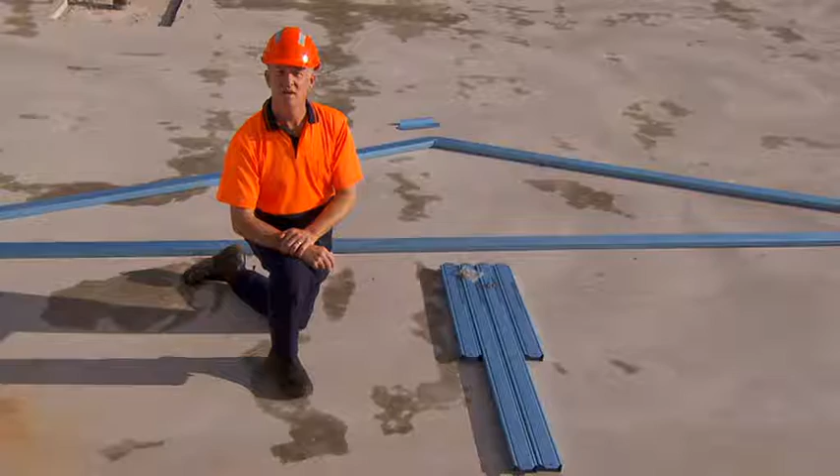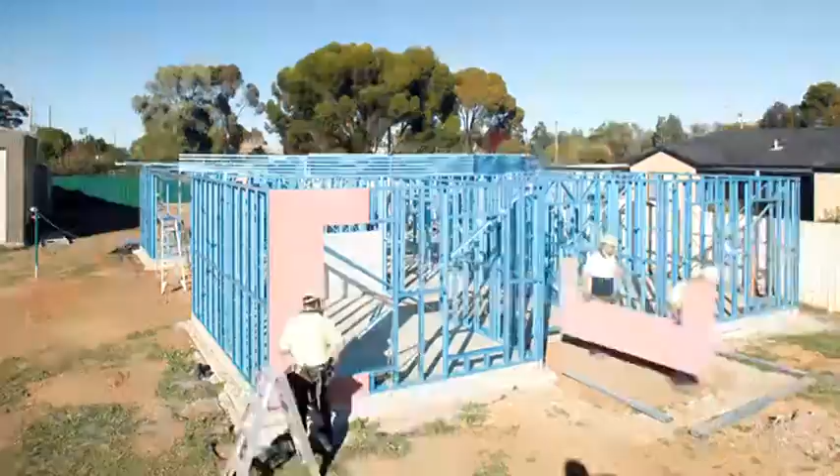And we'll show you how easy it is to assemble our building system on your construction site. This video offers general installation advice. Refer to the Enduro Wall and Enduro Truss design manuals, construction guides and the BCA for full details.

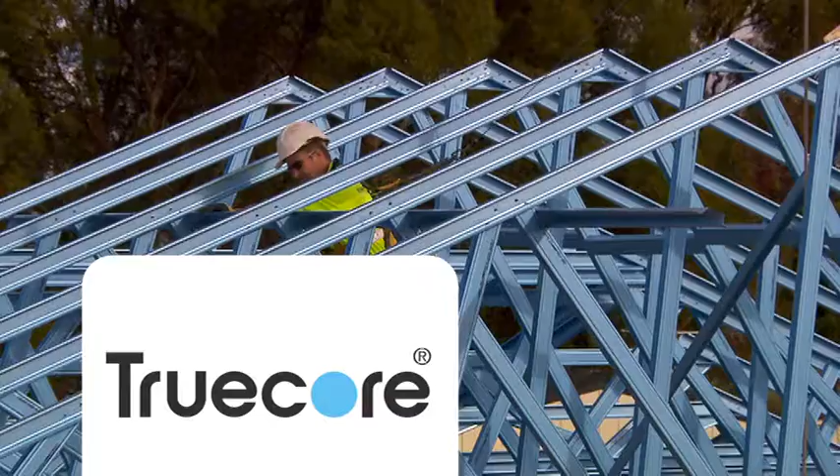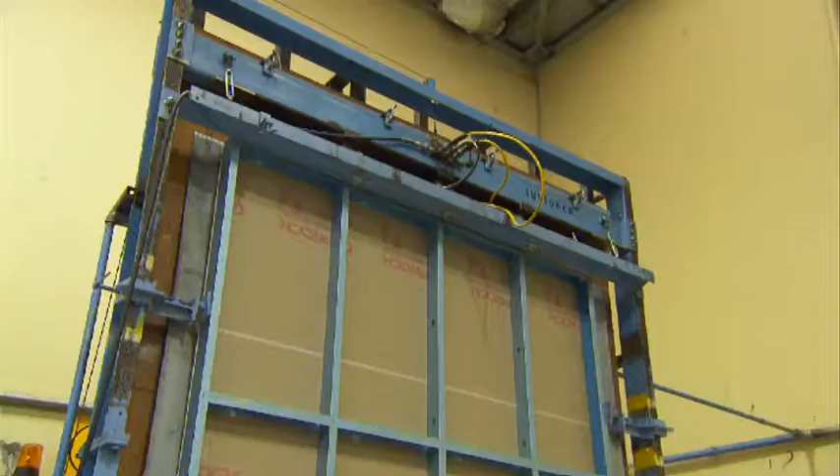Enduroframe structures are detailed and designed using our latest CAD technology using Australian-made TRUECORE steel. The result is a building system that has been designed for the builder. You can use the Enduroframe system with confidence because it's fully engineered and tested by BlueScope Steel.

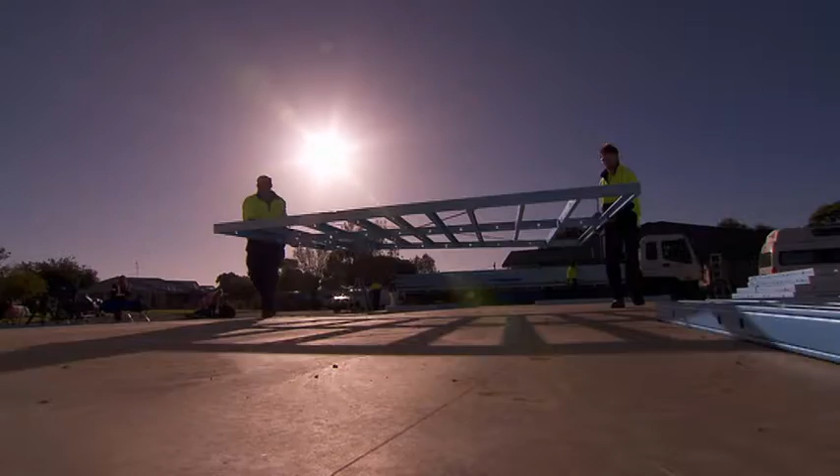The Enduroframe building system can be supplied either as a fully assembled frame or a knockdown kit of components for your site assembly. The lightweight Enduroframe building system is made up of the Enduro Truss roof system and the Enduro Wall framing system. And it's easy for you and your crew to assemble on virtually any building site.

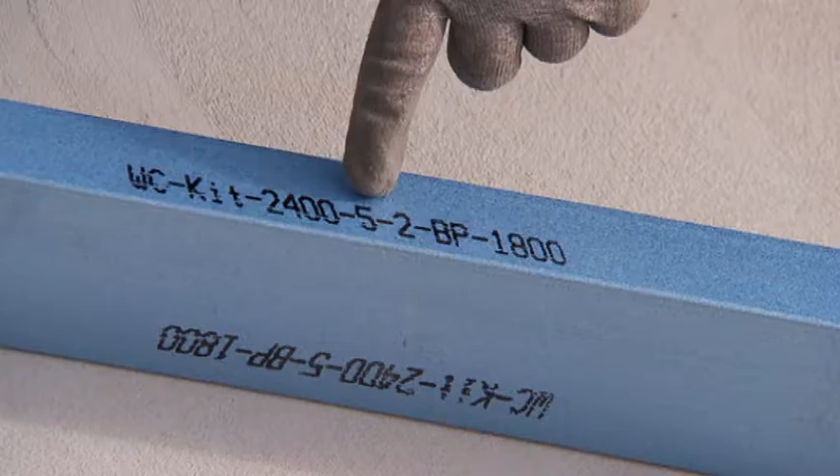You'll see that each part is marked with the job name, frame or truss number, part number and part usage, making it simple for you to work out which part goes where. All you need to do is match the parts provided with the drawing, align the pre-punched holes and screw it together. It's that easy.

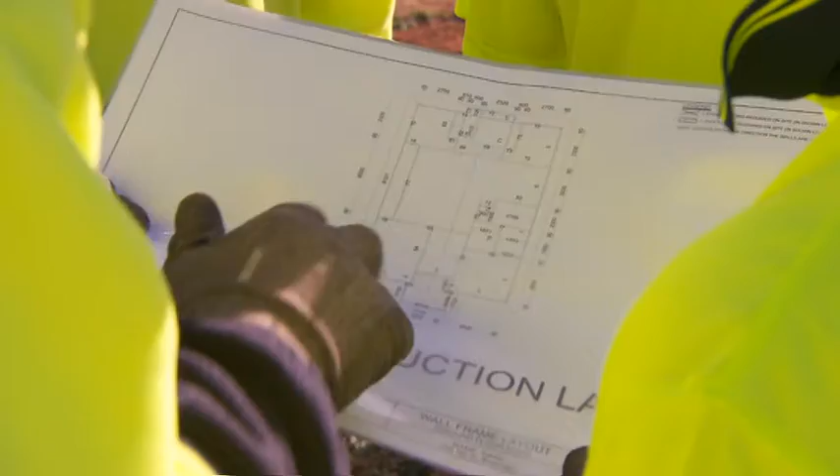Our first consideration is worker safety. The HIA recommends a safe work method statement be written and that the worksite conforms to the safe work practices in the BCA. And make sure you read our installation manuals before you start work.

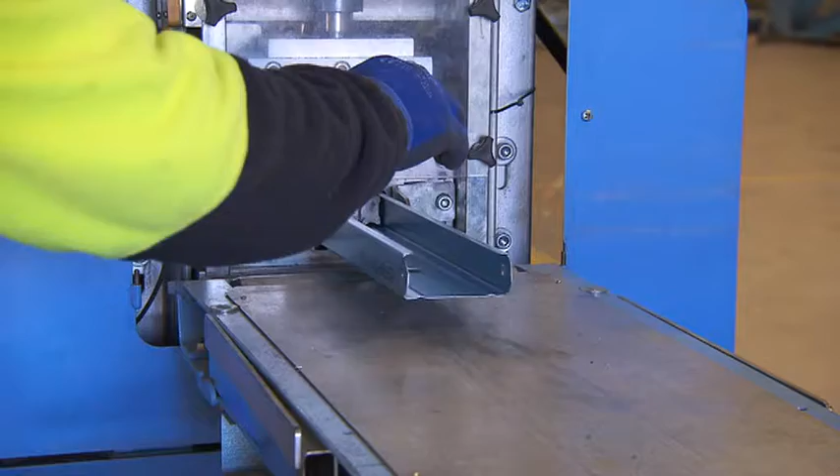Your building plans are input into the Enduro CAD software where the complete structural frame is detailed and prepared for production. The Enduro CAD system outputs assembly drawings for all wall frames and roof trusses, layout drawings to locate the assemblies on site, and documentation for authority approvals.

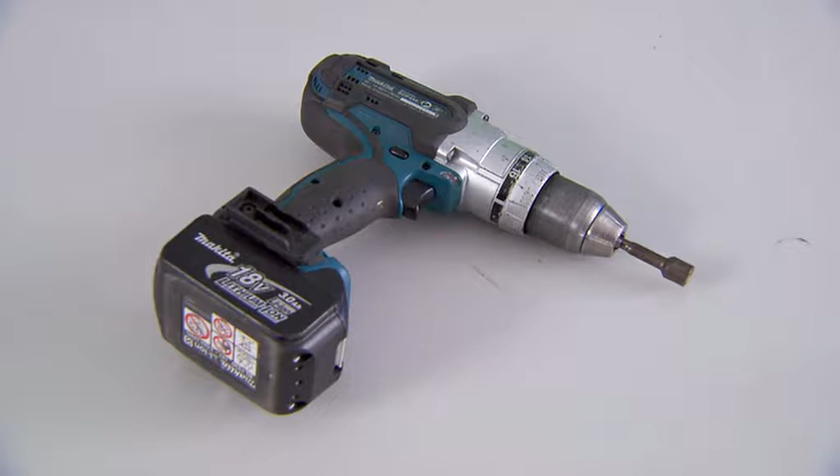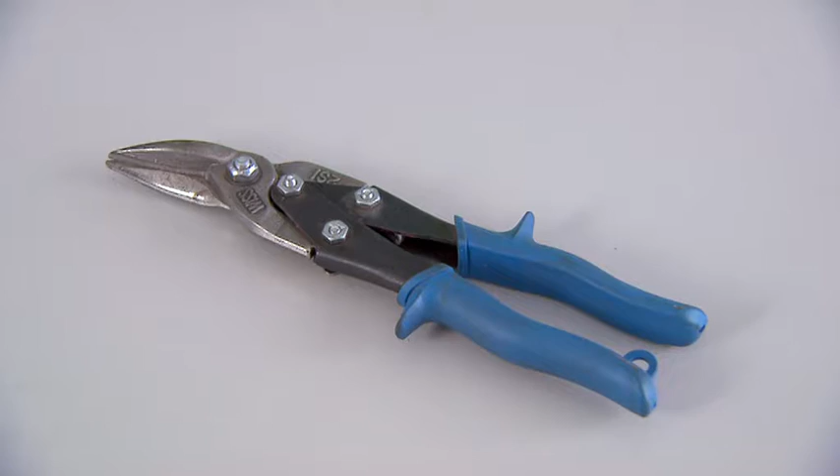Okay, now let's look at a wall frame assembly. Here's the tools you'll need. Screw gun with hex head bits, handheld grinder, cordless drivers, circular saw with metal cutting blades, tin snips, spirit level, marker pens, string lines, clamps or vice grips, measuring tape, a hammer and finally a hacksaw.

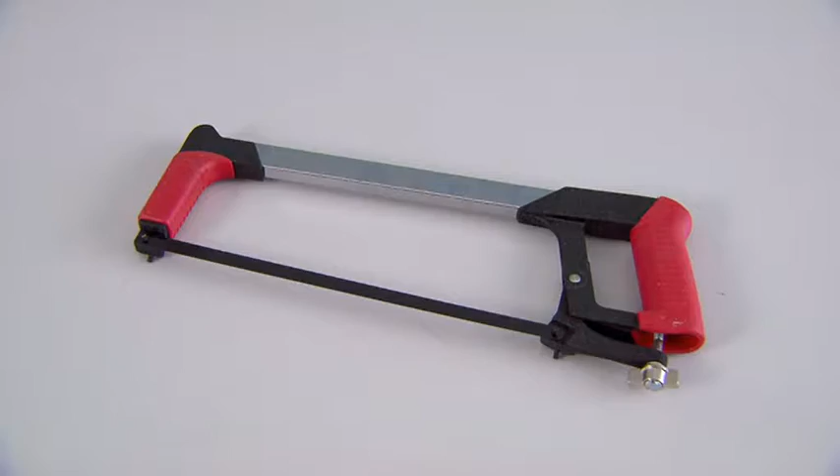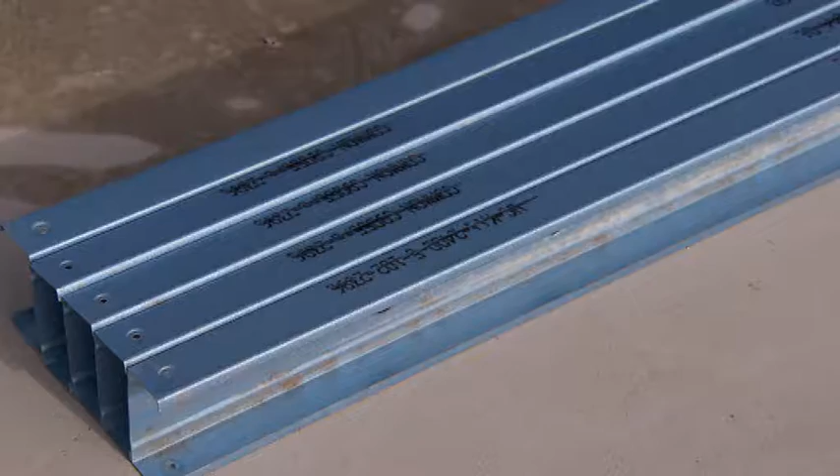Each wall panel will arrive separately bundled with the components clearly labelled. For on-site assembly, the assembly order should match the erection sequence. Refer to the Enduro CAD layout drawings supplied. Identify the plates, studs, heads, sills, unders and overs from the branding information on the parts. Lay out the top plate, bottom plate, noggin and studs in the correct orientation.

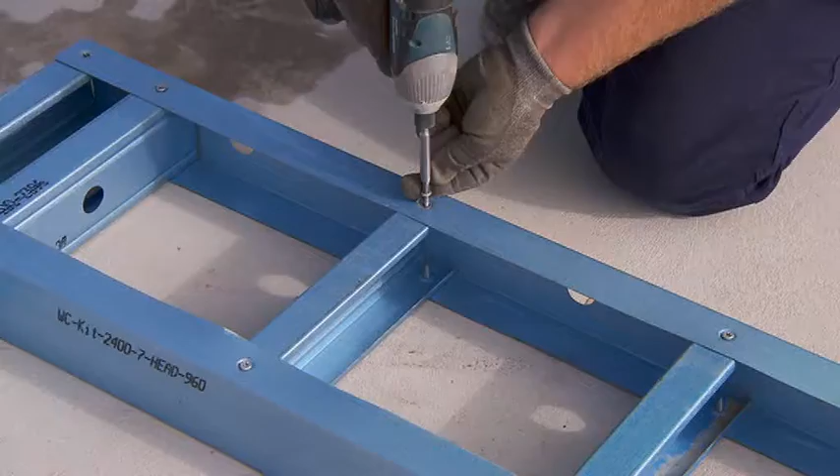Pass studs through the Enduro Wall continuous channel noggin and engage the studs into the bottom plate by aligning the dimple positions. The dimple holes and notches enable easy component layout and assembly. Fix through the top face with a framing fastener. Engage the overs into the heads and top plate, fixing the top face with framing fasteners.

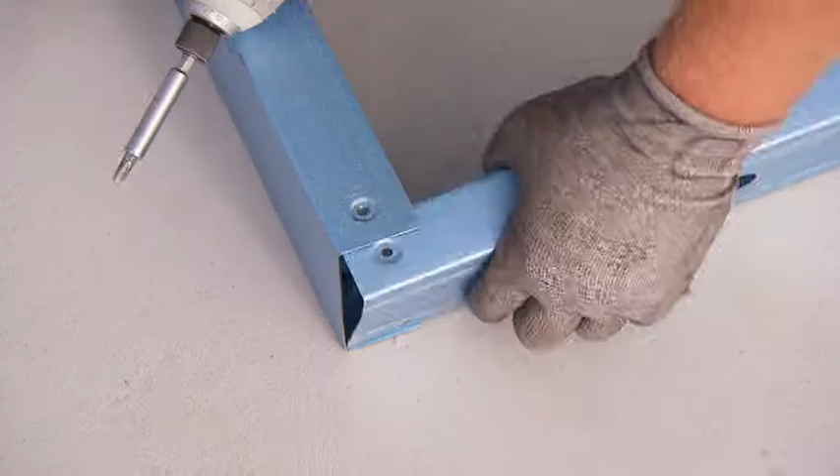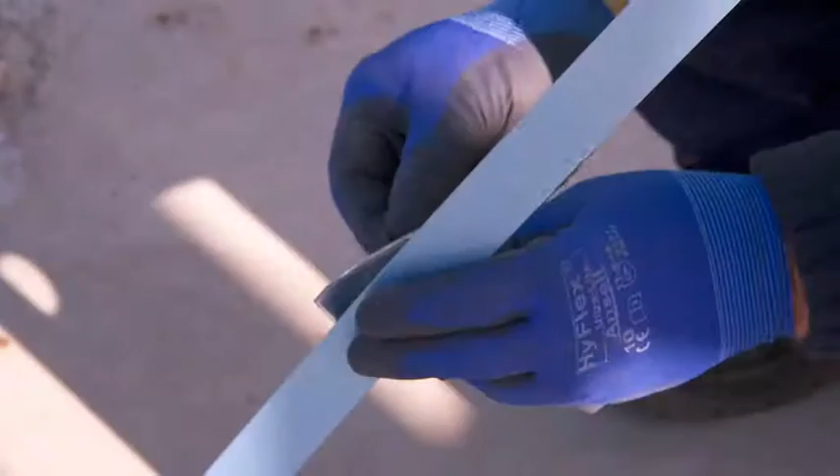Slip the top plate over the studs and align the holes. At this point, fasten all aligned holes. Flip the frame and install framing fasteners into each aligned hole. For factory assembly, jigs and lifting equipment may be used to aid the assembly. Square the frame using a jig or by measuring diagonals and install bracing. Strap bracing should be left untensioned as this is completed after frame construction.

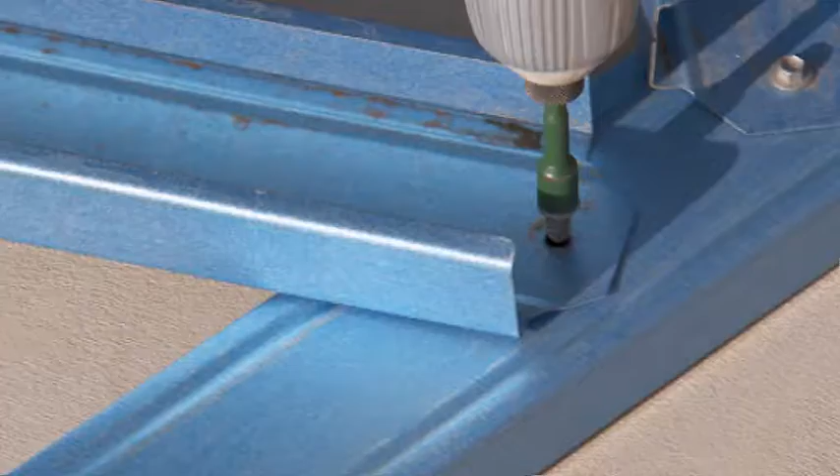Okay, let's look at a truss assembly. Trusses utilise the Enduroframe system of matching punched holes for assembly. As you can see, no jigging is required, which means that either on-site or factory assembly is possible. Again, components are branded with the job number, truss and part number. Webs are numbered from left to right and chords counterclockwise around the truss from the bottom chord.

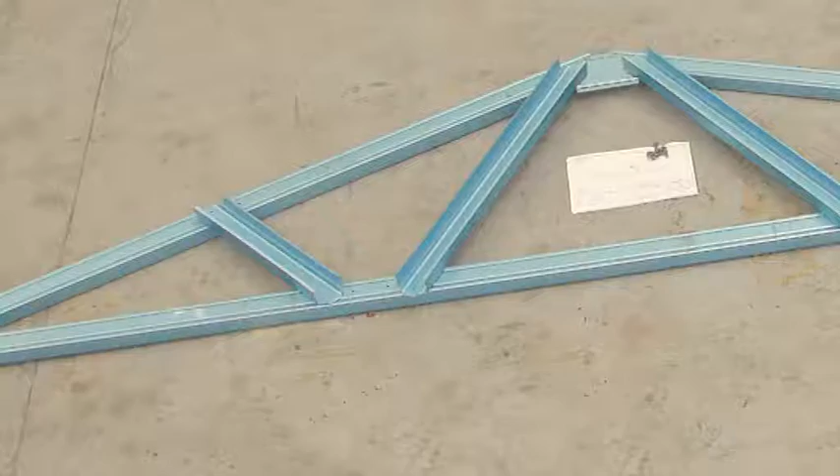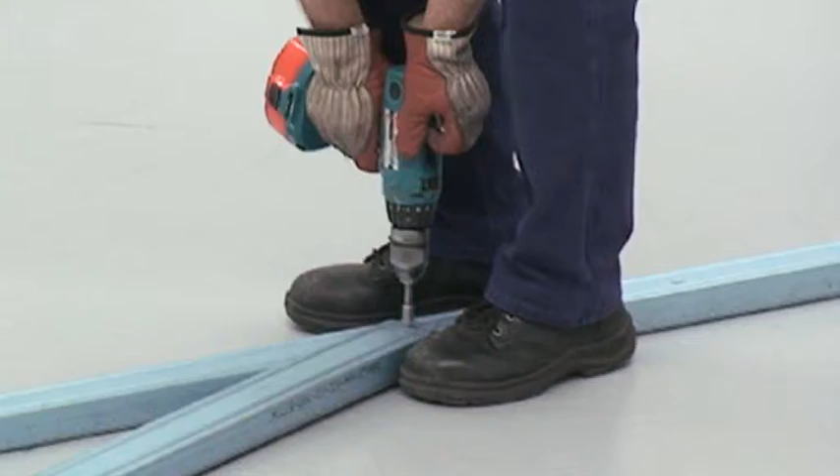The assembly of each truss is simple. Let's look at a basic A truss. Referring to the assembly drawing and the detailed connection drawing supplied, lay the chords in their approximate location, toes down. Engage the top chord into the bottom chord notch and align the appropriate holes. Align the holes at the end of the top chords and fix with a truss framing screw.

Place the short apex stiffener across the apex as shown on the connection drawing. Align the stiffener end holes with those on the truss top chords and fix with truss framing screws. Now, locate each web, either toes down if a flush configuration or toes up if non-flush. Align the holes with those punched on the chords and fix with truss framing screws.

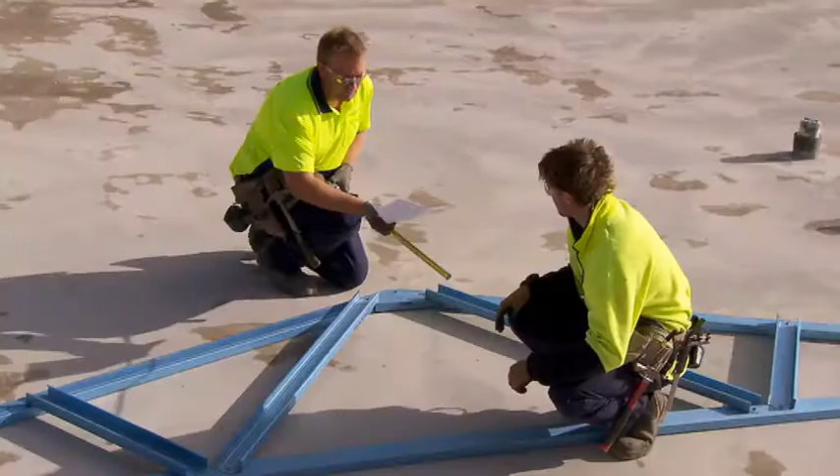Note, the webs should force the chords into the correct geometry without jigging. The truss will only go together one way. Check the overall height and span is correct. The overall height and span should now match the quality check dimensions on the assembly drawing. After this quality check, any boxing or reinforcing must be completed.

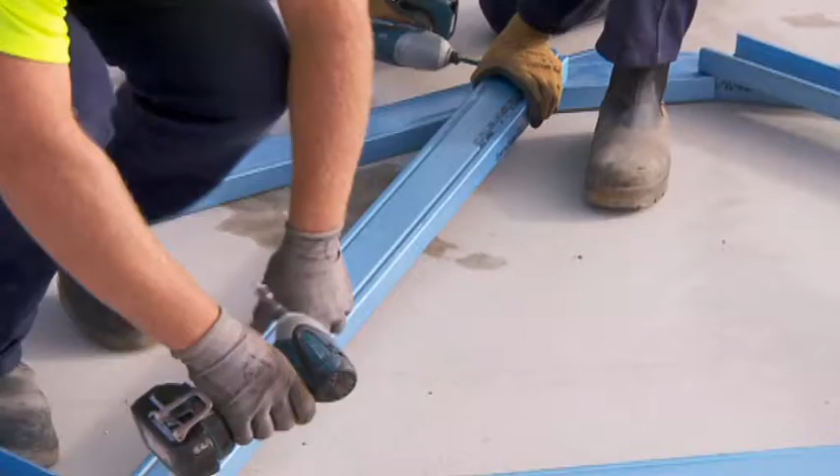First, using the components supplied, box any webs or chords as shown on the assembly drawings. Screw the boxing to the webs with 2 screws at each end and the centre. For chord boxing, use 2 screws at 600mm centres along the member. Place reinforcing screws to the chord-to-chord connections as shown in the connection drawings. Web reinforcing screws are nominated on the web branding.

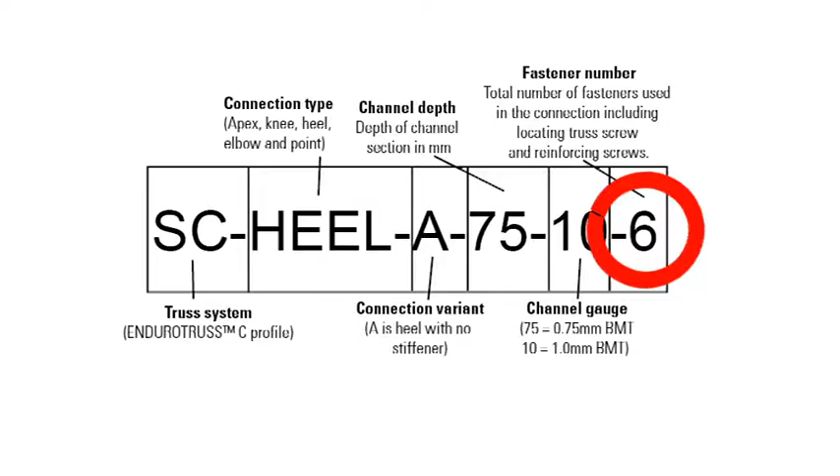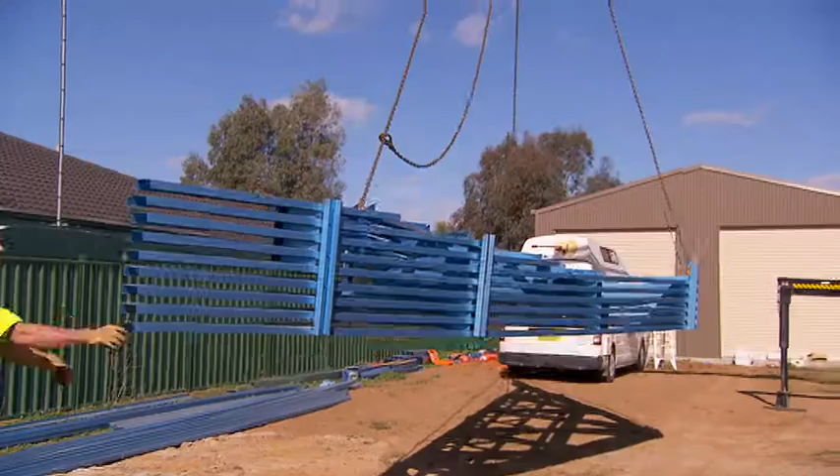The last number in the brand string is the number of screws at each end of the web, including the truss framing screw. Some connections may require stiffening plates or angles. These should be fitted in accordance with the connection drawings supplied. Additional screws may be required on large span trusses for lifting. Other truss types are assembled in a similar fashion. Stack the trusses in the order they will be required for installation.

We hope this video has shown you how easy it is to assemble the Enduroframe building system, the smart, simple solution to house framing.